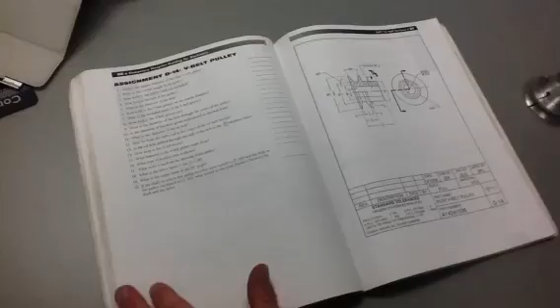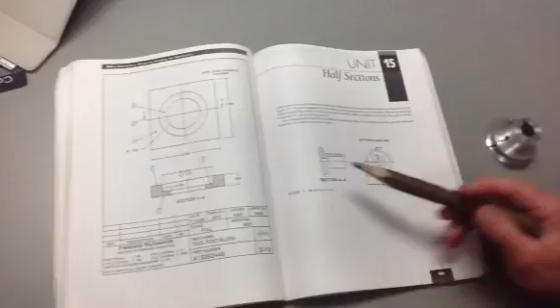Alright, today we're going to talk about half sections. If you look in your book on page 85, you have the half sections unit. Now, we talked about full sections in the last unit, and full sections actually cut all the way through the part. Just like if you were to look at D15 over here, the cutting plane line goes all the way through the part. You've got your lines of sight pointing in that direction.

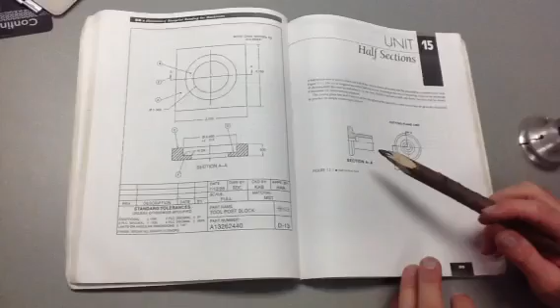What we're doing, we're cutting a part. We're looking at the interior in that direction, and this is what you would see. You've got section lines on both sides because it is a full section. Now, sometimes we want to see both the exterior and the interior of the part. That's where half sections come in.

You see here we've got a cutting plane line that passes over the outside, goes to the middle, and then comes up. What that means is we're going to remove this section of the part so we can see inside of it.

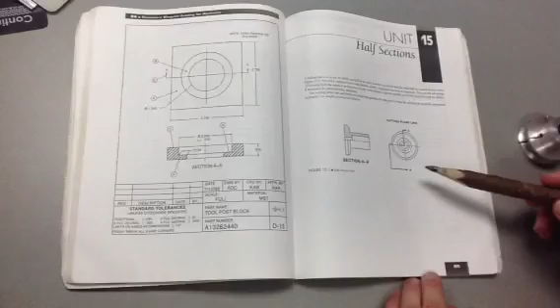Now, first thing I want to tell you, anytime you've got a section view and you've got a cutting plane line, that doesn't mean that we make the part and then we cut a piece out of it. I've had someone in the past say, well, we're supposed to make it and then cut it in two. No, it's just to show you detail of what the inside of the part looks like. We're not going to cut the part.

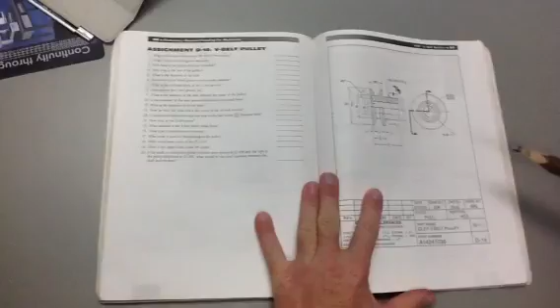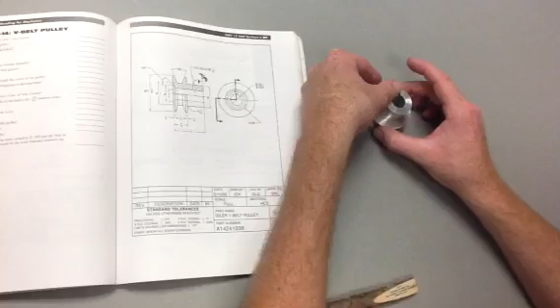Our print for this week is going to be an idler pulley, and I've got a pulley right here that's real similar to what you see on the print. I've got it sitting right here as it would be in the right side view, and the cutting plane line shows that we're cutting up and then going to the middle and over. So we're actually removing this part.

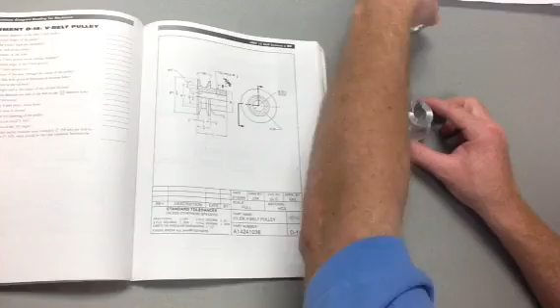You like my new pointer there? I've got a nice stick with a pencil lead sticking out of it.

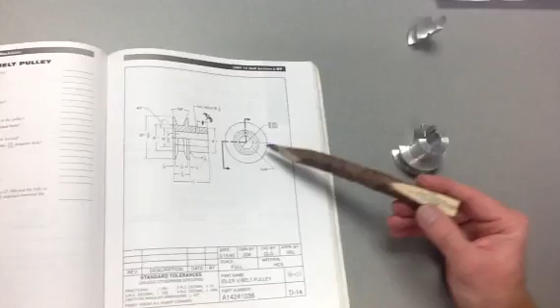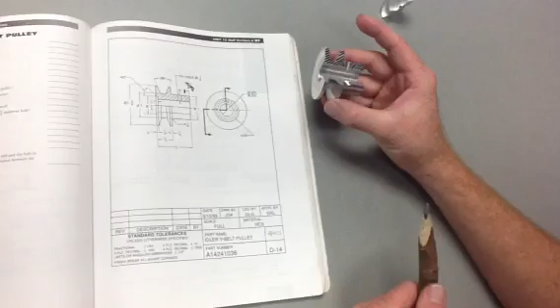We've got this part removed, and we're going to look in this direction because the arrows are going that way. We're going to see the exterior of the part and the interior of the part, just like this right here. You're going to see the exterior down here, and you're going to see the interior up here where you see the section lining. Again, the section lining will be right here on the part where the cutting plane line is actually touching the part.

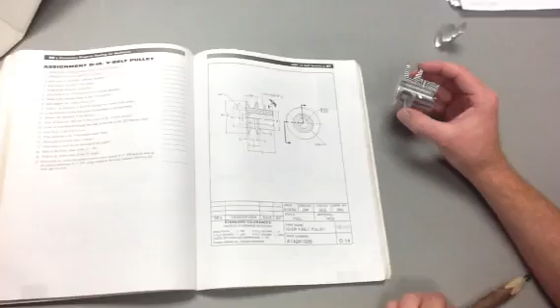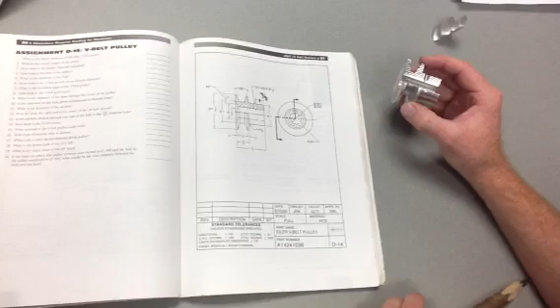That's half sections. Remember, if you're looking at half the exterior, half the interior of the part, it's a half section. If you're looking at the total interior of the part, it is a full section. Now, there are more types of section views. There are section views for details, if you just want to cut a part in a certain spot. There are offset sections. There are all kinds of different section views, but the only ones we're going to go through in this course are half and full.

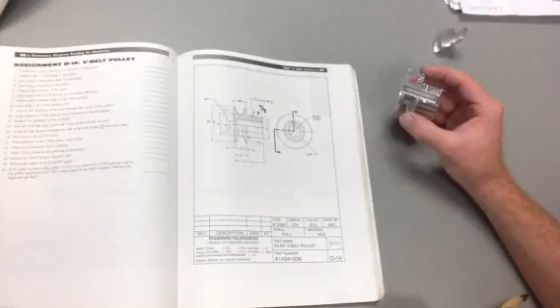One thing about your print this time, it says 1/8 inch right here from the end of the part over to the oil hole. That needs to be 3/8 of an inch. So when it asks you the question, it's going to say refer to your lecture. This is what I'm telling you. It's 3/8 right here from the end of the part over to the center of the oil hole.